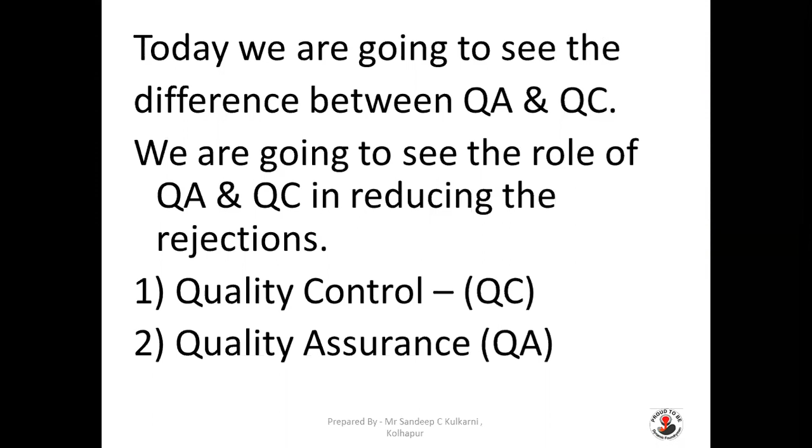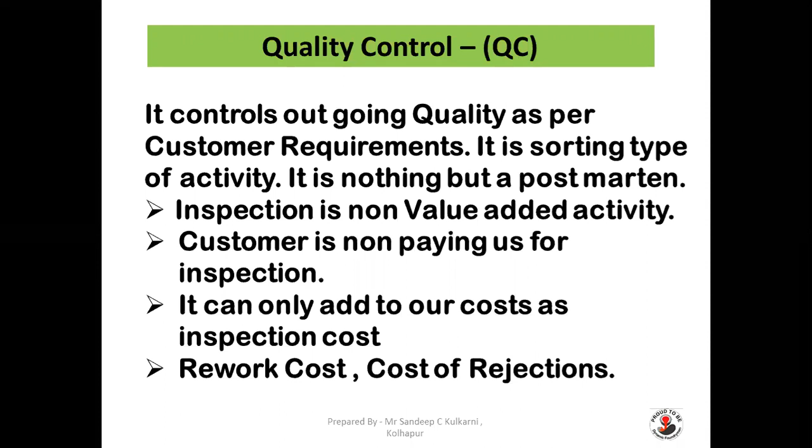Inspection is a non-value added activity, that is waste. The customer is not paying us for the inspection. It can only add to our cost as inspection cost, rework cost, or cost of rejection. So QC is a very old style of quality function which ensures that the quality is inspected and OK parts are passed on to the customer.

So the parts are sorted out into OK parts and not OK parts. OK parts are sent to the customer, not OK parts are either reworked or salvaged, or some deviation is taken, or if it is not possible, it is rejected as a defect in our quality department. Inspection is a major part of this system and it involves 100% inspection before dispatch.

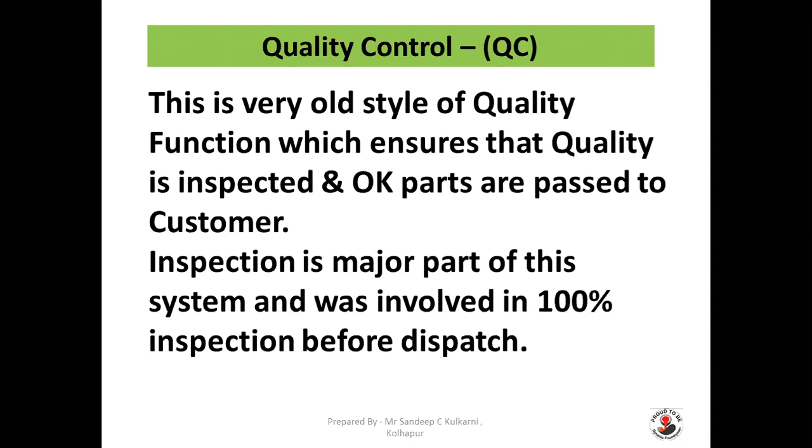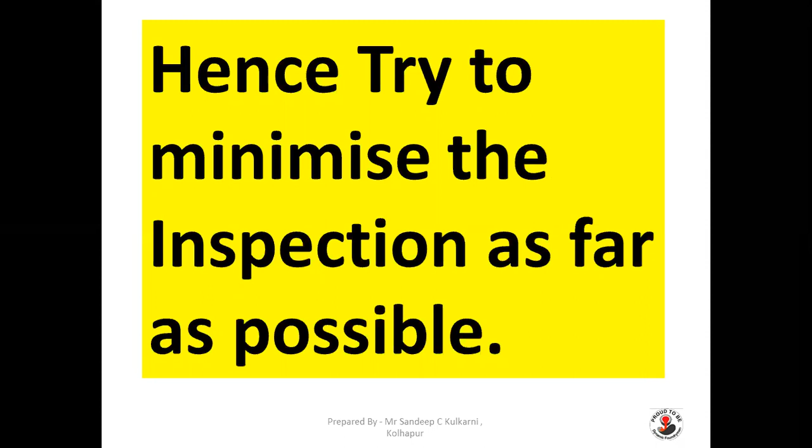So every part has to go through this inspection process before it passes to the customer. And this is nothing but a 100% inspection to segregate OK parts from the total parts. So it is basically a post-mortem activity and inspection activity. As it is a non-value added activity, we all know it is a waste. We have to try to minimize the inspection as far as possible.

This is basically a post-mortem activity, as we already saw, but it helps to arrest wrong or non-conforming parts going away to the customer end. So the important thing in QC: even though it is a non-value added activity, even though it is a post-mortem activity, even though it requires 100% inspection, even though the customer is not paying for it, we have to do this to arrest wrong or non-conforming parts going from our factory to the customer end.

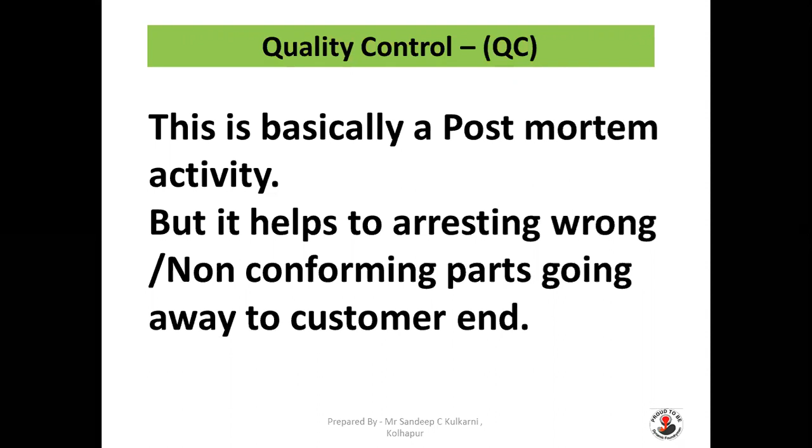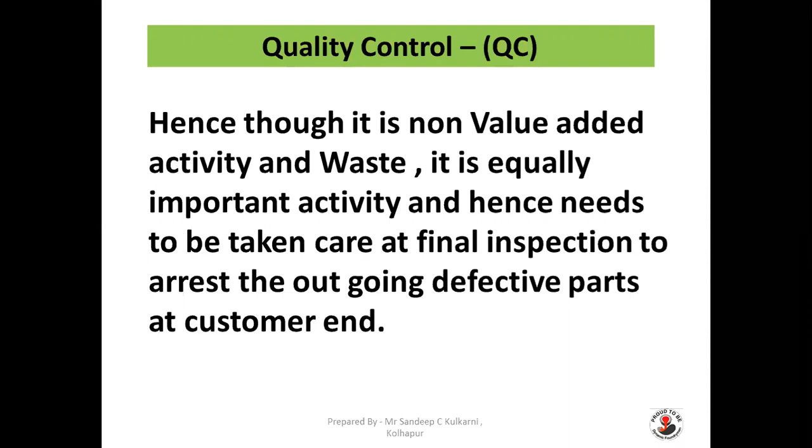So QC is again an important activity. Though it is a non-value added activity, one has to perform this activity to ensure that wrong parts are not given to your customer. Hence, though it is a non-value added activity and waste, it is an equally important activity and needs to be taken care of at final inspection to arrest outgoing defective parts at the customer end.

Now we go to the second way of quality, that is quality assurance. This is a newly defined concept of quality function. This is now popular and used in most of the industries. Here, everyone in the organization is responsible for the overall quality culture in the organization.

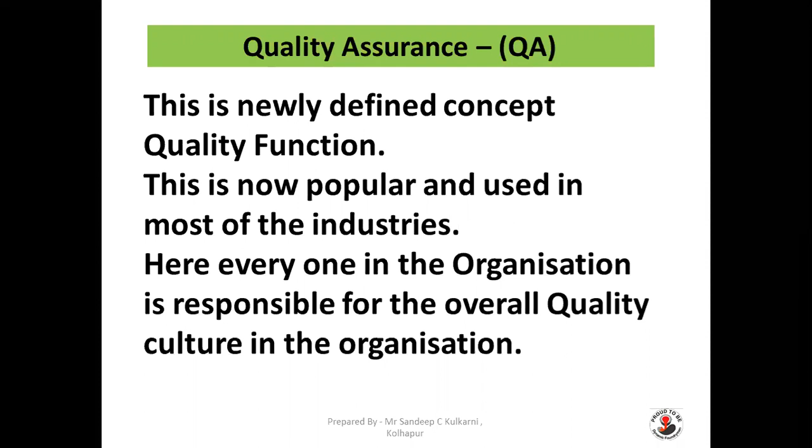So it's basically a cultural change that is required if you want to improve the quality of your product, and each and every person in the organization, right from the owner to the operator level, is responsible for the quality of the product in the organization. So it's everybody's responsibility. Quality assurance helps in producing defect-free parts right at the first time.

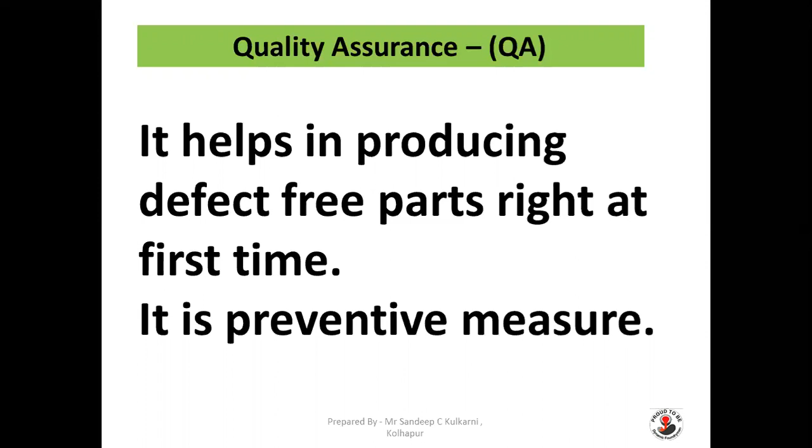So this is very important: producing right-first-time parts, that is defect-free parts, is the responsibility of quality assurance. It is a preventive measure. We know QC is basically post-mortem, but quality assurance is a preventive measure. It is not only responsible for the inspection activity, but is equally involved in the design and implementation of the process. So quality assurance is important here because it is involved in process design as well as process implementation.

So it's very important to understand what process is required for that particular part or product, and then design it and see that it has been followed and implemented in process control by the production team. Quality assurance is also involved in various trainings in the organization for increasing quality awareness amongst the employees. Improving quality awareness in the organization, right from top to bottom, by conducting trainings at various levels, is the responsibility of quality assurance.

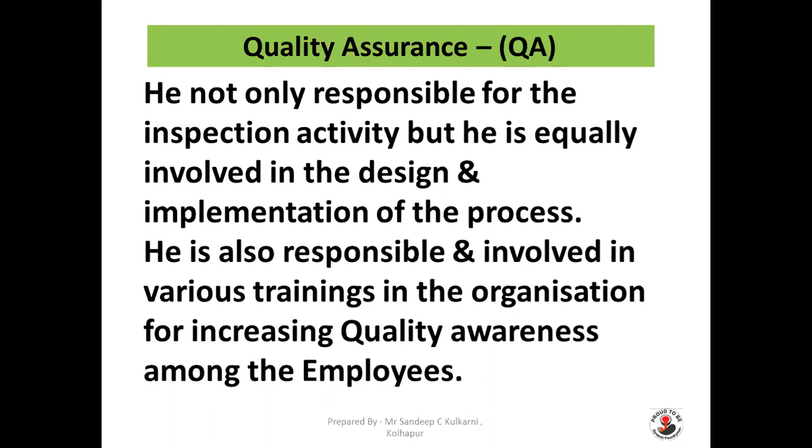It involves process design. It works as a preventive measure. We must understand customer-specific requirements and design our process such that it will meet customer requirements.

So it's very important that it meets customer requirements right at first time. This is very important because process design, if you do it properly and if you follow it properly, then definitely there are chances that you will get good results in terms of right at first time, and it will help you in reducing the burden on QC, that is quality control, of checking 100% parts before dispatch, because you will ensure that whatever products are being produced are inbuilt quality products. So the defects will be less, the defect prone processes will be eliminated, and you will get right at first time products in your process control.

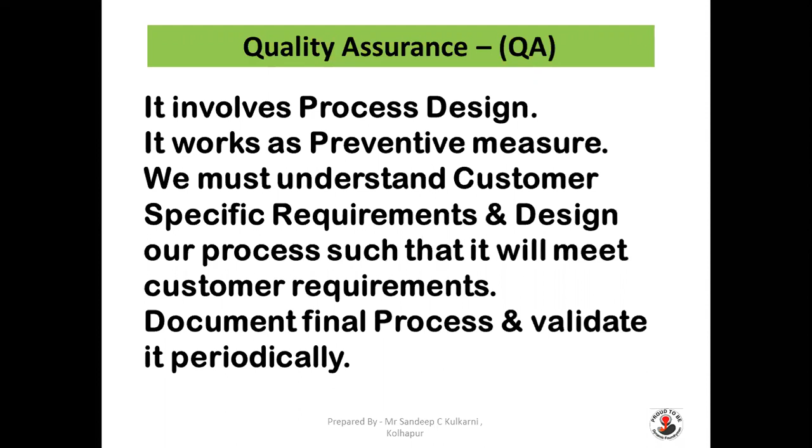So document the final process and validate it periodically. It's very important that you document the final process, that is the final process design activity, and validate it periodically so that you can understand whether whatever process you have designed for the first time right part is being followed properly, and whether it is giving you that kind of result continuously and consistently. So it is very important to validate these processes.

QA is also responsible for monitoring and controlling the quality of incoming material. So the responsibility of quality assurance is not only to design the process and to ensure that it is maintained or implemented, but it is also responsible to monitor and control the quality of incoming material. We all know the quality of input material will decide the quality of output material. For example, to cook a good veg biryani, one has to take good quality raw rice, that is basmati rice. Without basmati rice, one cannot make good quality biryani. So it's very important to have good quality material for getting good output material.

So here quality assurance plays an important role in prevention, through good quality material. So good quality material should be the responsibility of quality assurance. He has to ensure that all the material coming inside is of good quality, and only good quality material is accepted and given further to the production department for processing.

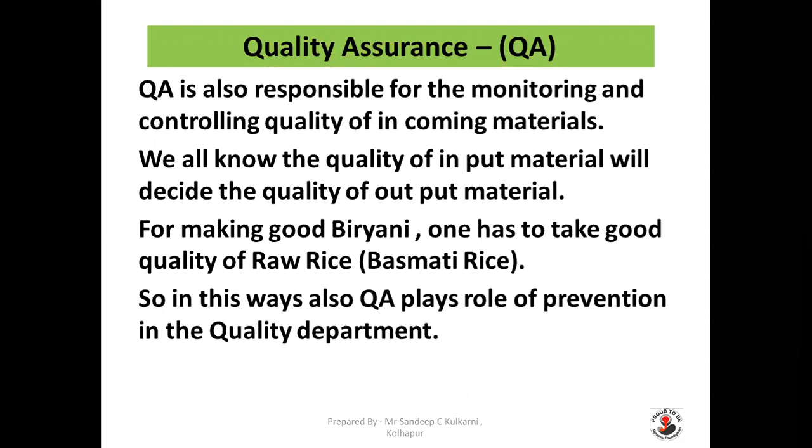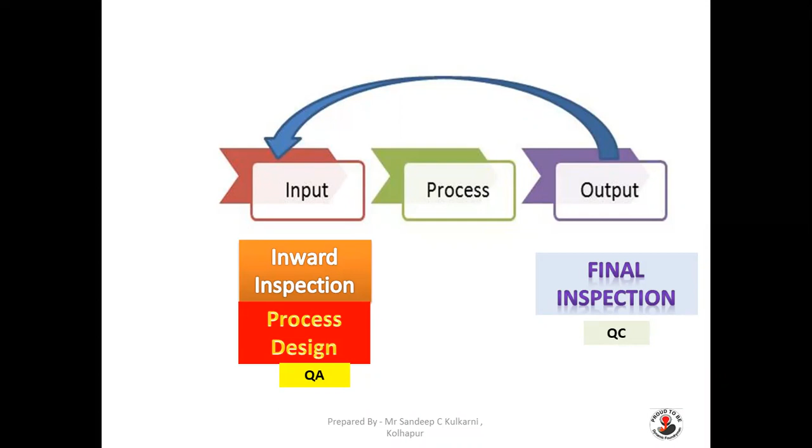Whereas output, the castings or parts going from your last stage inspection to the customer are to be 100% inspected, which is the responsibility of QC. There is a 100% final inspection to segregate okay parts and defective parts at the final stage. So it is the responsibility of QC. Again, after final inspection, QC separates some non-conforming parts, which are again input for QA to take further action on the process design, raw material inspection and process control, etc.

So after the final inspection, quality control gives you feedback that in the last batch there were so many non-conforming parts. So you have to understand, analyze those parts, and take appropriate action either in incoming material or in process control or in design of process, whatever is required. You have to take those actions and make changes, and then whatever parts are produced next time will definitely be of better quality. So to improve those defective parts, again, QA is responsible to take action.

So based on these inputs, QA has to modify the process or correct the process or train people. This is another important thing: to train people, to make people aware about the defects, about the non-conformance, about the process deviations, so that next time it will not happen. So train people to avoid such problems in next batches. Again, it is the responsibility of quality assurance.

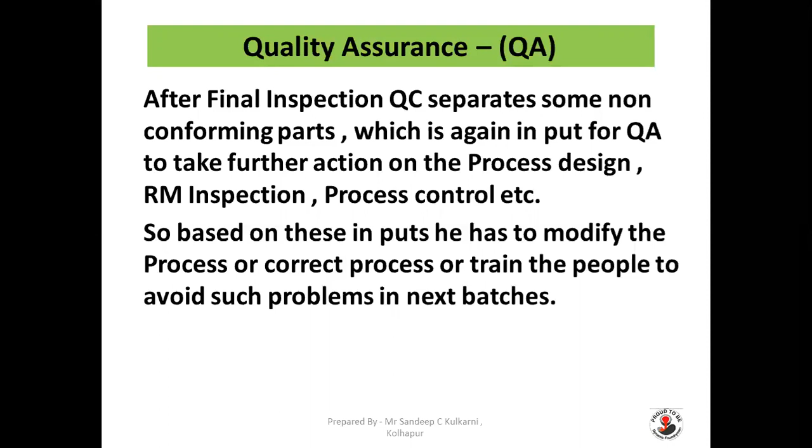Quality assurance is equally responsible for process control. For that, he has to take up process audits as an effective tool to get important input on the loopholes and deviations in process control during the production run.

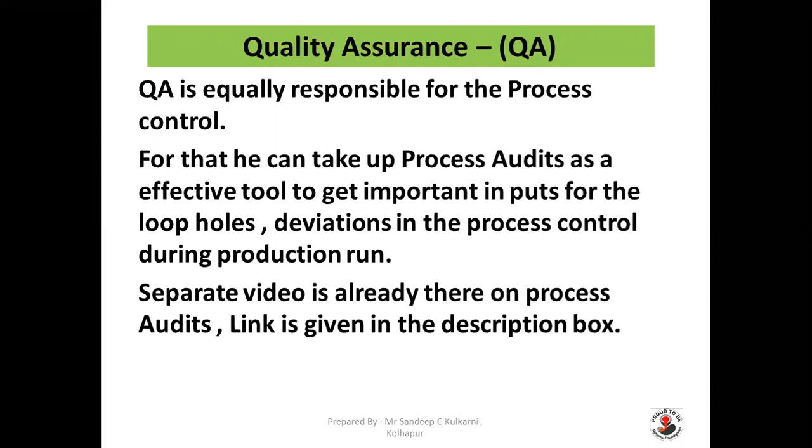Difference between QC and QA, that is quality control and quality assurance. Quality assurance is nothing but process oriented. It works on the process design, input, process. So it is basically process oriented. QC is product oriented. It inspects the parts which are coming there, segregates, and okay parts are shipped to the customer, not okay parts are rejected. So QC is product oriented.

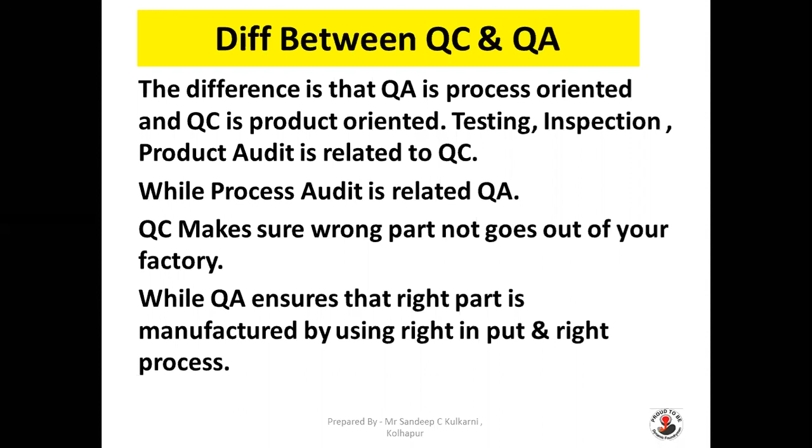So this is very important to understand what is QC. QC is responsible for wrong parts not going to your customer, whereas QA ensures that right parts are manufactured or produced by using right input and right process. Prevention is always better than cure. So QA means prevention. Quality assurance is prevention, while quality control is detection. Quality control just detects it. It is a post-mortem activity, as we have already seen.

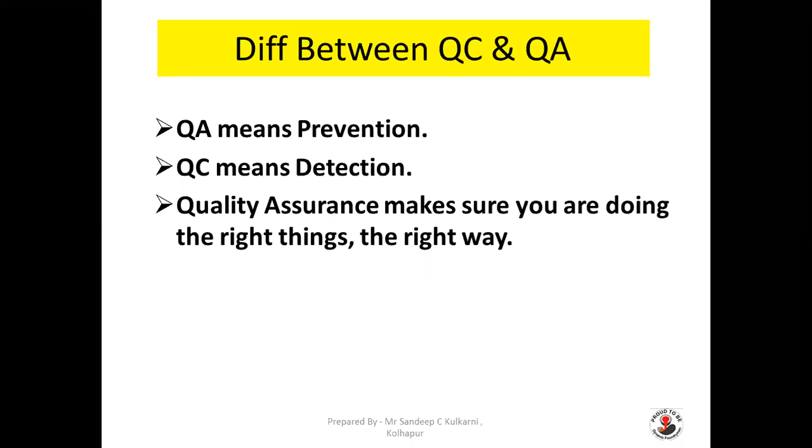Quality assurance makes sure you are doing the right things the right way. So it is very important to have quality assurance at the top of your quality to ensure your quality works as a preventive measure, and it helps you in improving quality awareness in the organization. So, role of QA and QC in reducing rejection. QA will help you in improving the percentage of right first time by better process design, better process control. So it plays an important role in controlling and reducing rejections.

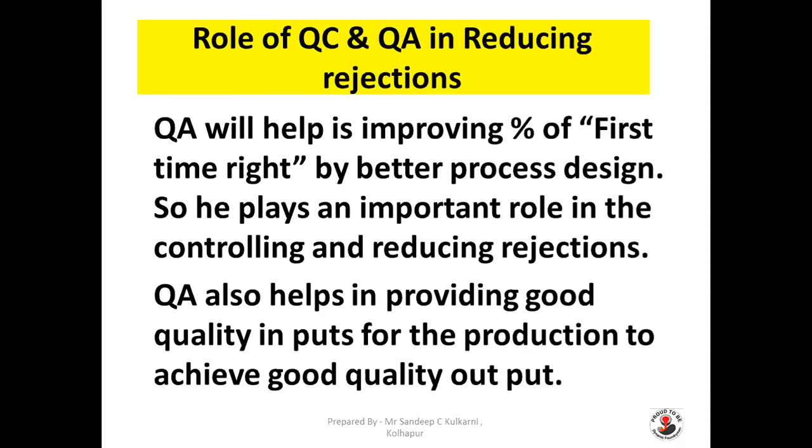QA also helps you in providing good quality input for production. That is very important, it helps you in getting better ideas, better control by doing process audits, providing you good raw material, and designing proper process control parameters. QC plays an important role in avoiding outgoing defective parts and reducing customer rejections and customer complaints. Customer rejections and customer complaints are always dangerous, and they will increase the dissatisfaction of the customer.

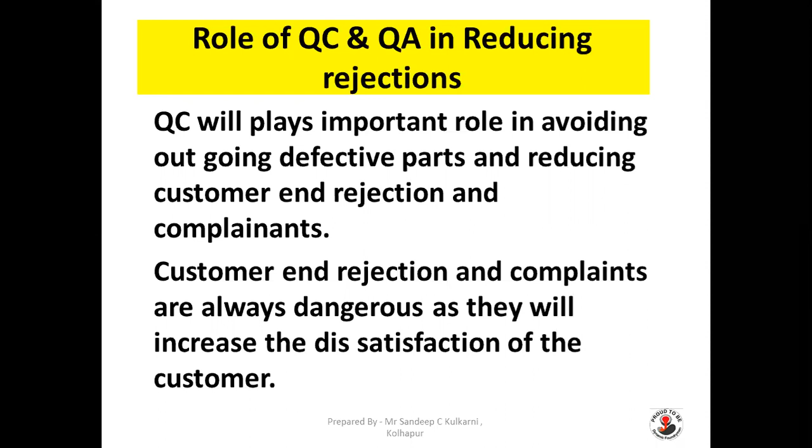So QC also plays an important role by restricting or limiting the wrong parts going from your factory premises to the customer end, which will help you improve customer satisfaction, because any customer dissatisfaction will definitely give an alarm to your business growth. So it's very important to restrict defective parts going out of your factory.

QC can give important feedback to QA and the production team about the non-conformance observed in final inspection for correction before next batch production to reduce further damage. So QC plays an important role here by giving proper feedback of defective parts: which defects, what heat number, cavity numbers, which shift, which supervisor, the area or location, the trends. All this information which QC gives to QA will help you take proper corrective action before the next production plan, so that those defects will not get repeated. Those defects can be eliminated by taking proper action. So this way, QC helps QA in reducing rejection as well.

So the role of QC is important here when it is sorting the rejected or defective parts. It is very important to get proper, effective data from those defective parts. A separate video will be published on this particular topic, as it is very important and interesting: how to analyze rejection for effective analysis and effective corrective action. So a separate video will be there on this topic in future.

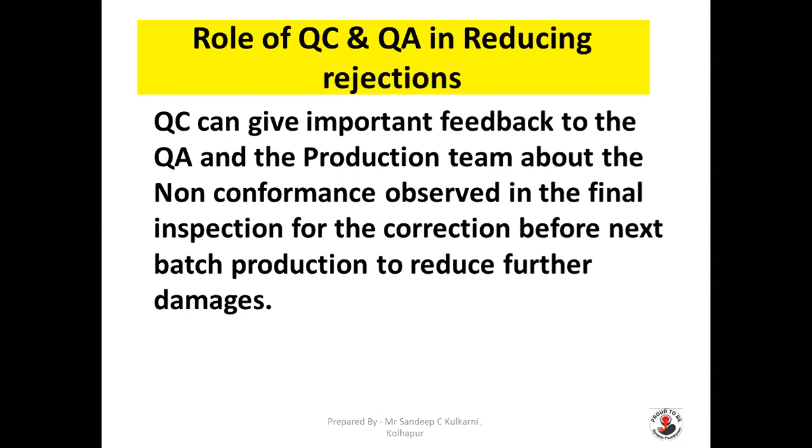But right now I can say that QC can help QA by collecting necessary data in a proper way that can help QA take effective corrective action to avoid those defects in future. So QA and QC both always play an important role in reducing and controlling rejections in the foundry. So it's a very important part of quality. So this is from my side.